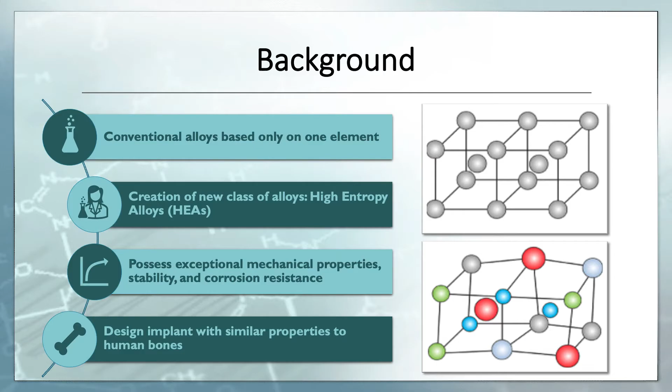There are 4 core effects governing the thermodynamics, kinetics, properties, and structures of the HEAs. The high entropy effect details that since HEAs have a higher mixing entropy, this causes the energy of the solution to lower at higher temperatures and causes a single solid phase to be stabilized.

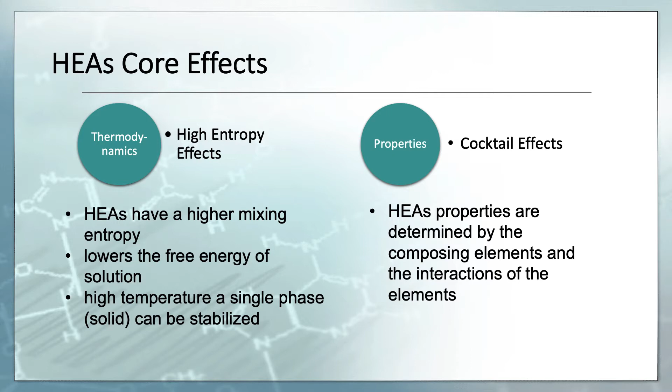The cocktail effect describes the properties of HEAs related to its composing elements. For example, adding lighter elements decreases the density. The properties are also defined by the interactions between the component elements. For instance, aluminum is soft and has a low melting point, but if it is added to an HEA, it can harden the HEA.

When an atom jumps into a low energy site, it becomes trapped, and the chance to jump out of that site will be lower. In contrast, if the site is high energy, then the atom has a higher chance to hop back into its original site. Either of these scenarios slows down the diffusion process, whereas in conventional alloys, the configuration before and after jumping into a vacancy is mostly identical. Additionally, the diffusion of each element composing the HEA is different. Some are less active than others, causing elements to have lower success rates for jumping into vacancies.

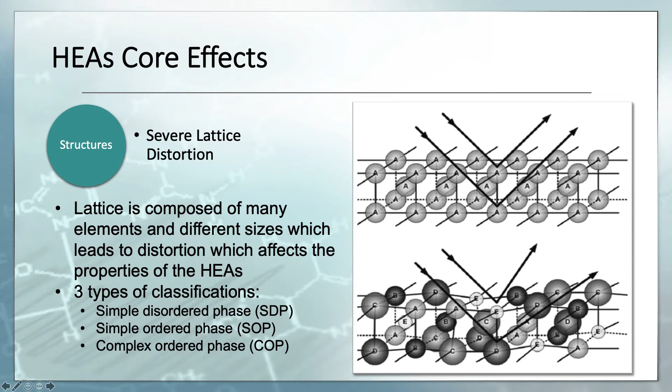Lastly, the severe lattice distortion describes the distortion of the lattice due to the composing elements being different sizes. The top of the picture shows a perfect lattice with the same atoms. The bottom picture shows a distorted lattice with solid solutions of different sized atoms. The larger atoms push away their neighbors, and small ones have extra space around them. This results in distortion, and there are 3 defined types of classifications for the lattice distortion as shown.

This research intends to determine possible alloy combinations that can be more compatible, stable, and corrosion resistant in the human body than the traditional implant materials. The use of biocompatible alloys will solve the problems associated with long-term implantation due to the exceptional mechanical properties they possess, as well as corrosion resistance. We aim to do this by analyzing and predicting a better alloy both experimentally and computationally.

For this project, my focus will be on the computation, and I will be using the OLI Studio Corrosion Analyzer to test multiple solutions with different alloys used in biomedical applications. The predicted corrosion rates, stability, and precipitation formation of all the different alloy and solution combinations will be evaluated. The solutions and/or alloys that seem to possess good potential can be observed and analyzed further experimentally in a lab setting.

Experimentally and computationally, a simulated body fluid, SBF for short, is created to mimic an environment close to that inside of a human body. A contact surface of choice, or alloy, will be put into contact with the SBF to see what interactions take place, what precipitates might form, and what solution parameters change, if any. The goal is to maintain a pH and ion composition relative to the one in the SBF, so one similar to a human body, as well as have no harmful interactions that could damage the human body.

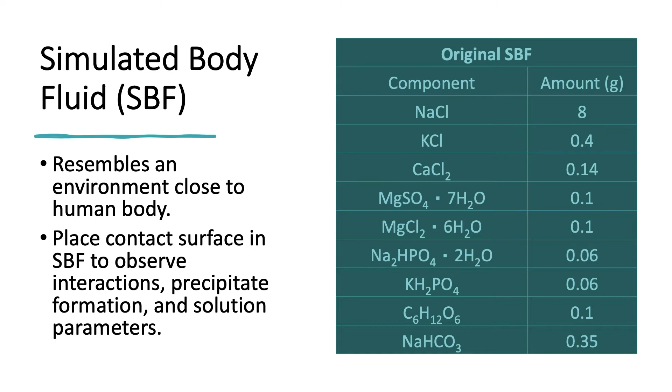Additionally, the type of precipitates that form and are present influence the corrosion behavior. These areas of importance will help to identify what materials have potential for practical applications, as well as gain a better understanding of what phases are formed and how that affects the HEA.

After creating the SBF, a single point isothermal calculation will be performed to view a calculation summary report of the solution. The report generates various information, but the areas of interest include the stream parameters, scaling tendencies, and the species output. In the stream parameters, we are interested in the aqueous properties, and we need to maintain the determined pH, one close to the human body.

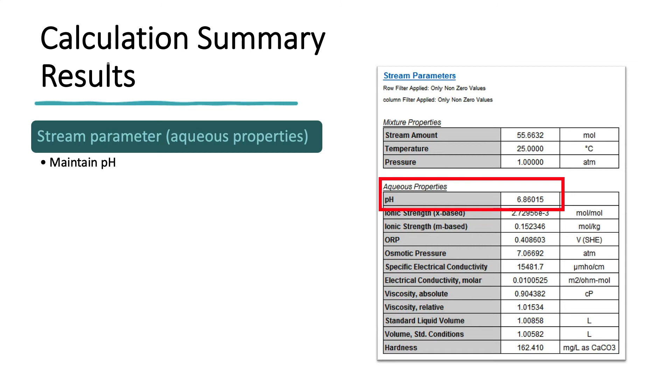The scaling tendencies provide a list of predicted solid precipitates to be formed on a scale from 0 to 1, 1 meaning a solid formed. The goal is to maintain carbonate hydroxyapatite as a solid precipitate, so a scaling value of 1, and all other precipitates at a minimum. Carbonate hydroxyapatite is the solid precipitate of interest given it will most resemble the formation of human bone.

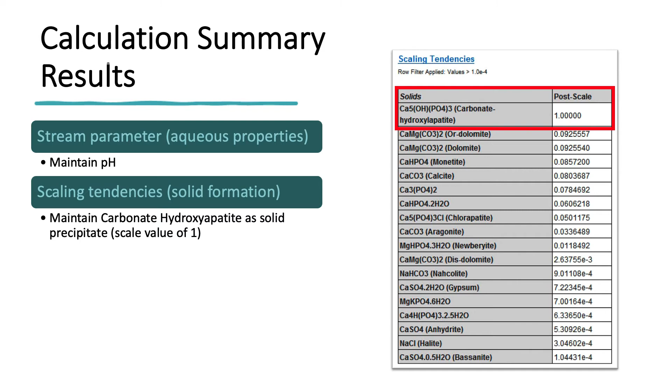The species output provides the total aqueous and solid molar concentration of each ion in the solution. The goal here is to have 0 solid molar concentrations. In red, we see the chloride ion concentration highlighted.

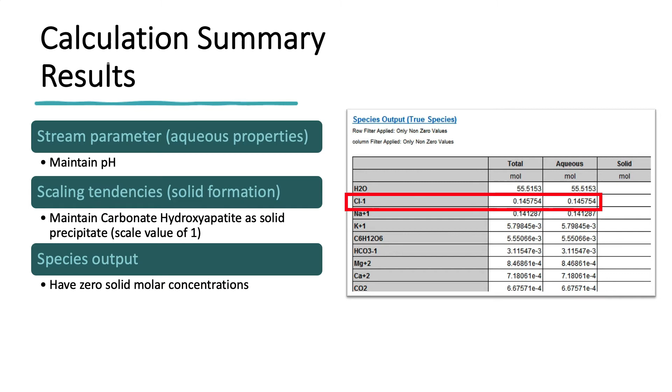For a greater understanding of the created SBF, the mass of certain components in the SBF were altered with the desire of this chloride ion concentration, in red, to be 10 times more and 10 times less than the original chloride ion concentration. So what we did was take the previous chloride ion concentration we saw highlighted in red and multiplied it by 10 and divided it by 10 to give us the goal of what chloride concentration we are looking for.

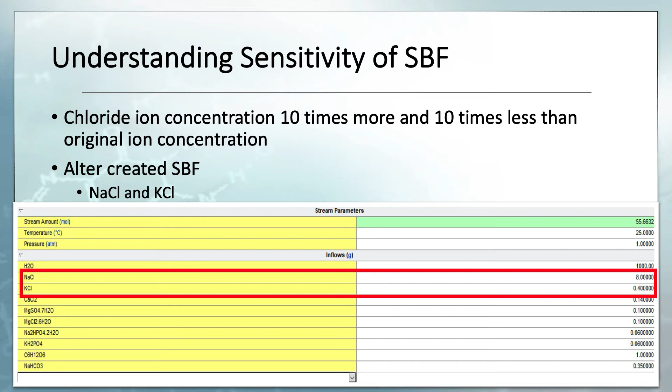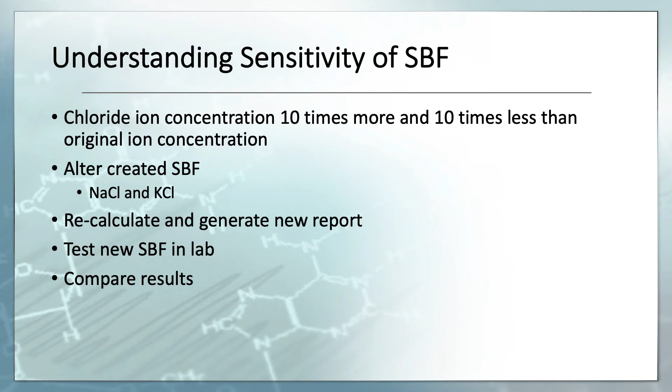And each time the mass of the component is changed, the calculation in OLI has to be performed again to generate a new report, and the chloride ion concentration has to be rechecked. Once the desired chloride ion concentration is found, the corresponding new inflows for each component will be tested in the lab.

Not only can the OLI software be used to predict results from the SBF solution by itself, but it can also be used to introduce a contact surface to the solution. By introducing a contact surface, a stability graph can be generated and corrosion rates can be calculated. The stability diagram is a representation of the Pourbaix diagram, which shows the possible thermodynamically stable species of an aqueous solution at different potentials and pH.

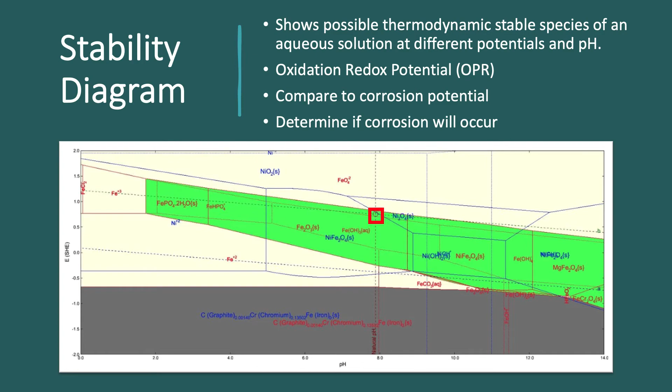Using this information, we can determine which alloys in OLI can be used to make calculations that closely match the alloy used in the lab, as well as have a similar composition to conventional alloys. The alloys selected to use in OLI were alloy 29 and stainless steel 316.

It is also important to note that the corrosion rate plot for each alloy available in OLI was generated and viewed to see if any pitting will occur. For alloy 29, no pitting was observed, but for stainless steel 316, there is significant pitting corrosion.

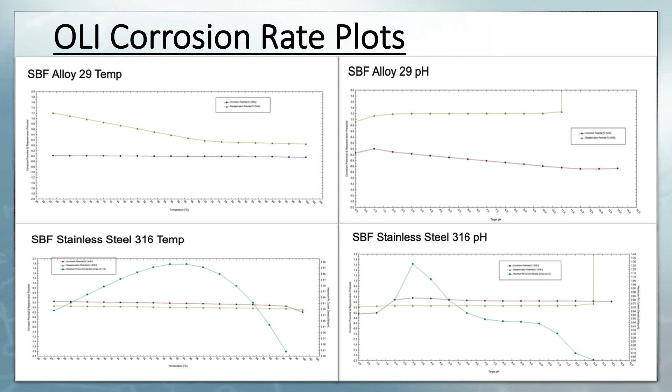Here we can see the corrosion rate plot for alloy 29 by surveying temperature as well as pH. Next, we see the corrosion rate plots for stainless steel 316. Already you can tell a difference when compared to the alloy 29 plots. We see a blue line in the plots. The blue line represents the pitting corrosion that will occur. Any amount of pitting observed will end up compromising the implant.

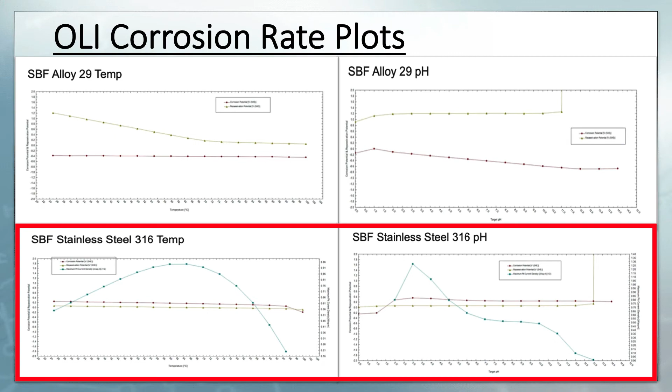But we can take it one step further and see how much of each element making up the alloy is leaching out into the body per year. To do so, we can take the desired element's composition and multiply it by the total amount of metal leaching out into the body per year. For example, in alloy 29, the nickel composition is 29%. So if we multiply the corrosion rate in milligrams per year by 0.29, you will have how much nickel is leaching out into the body per year.

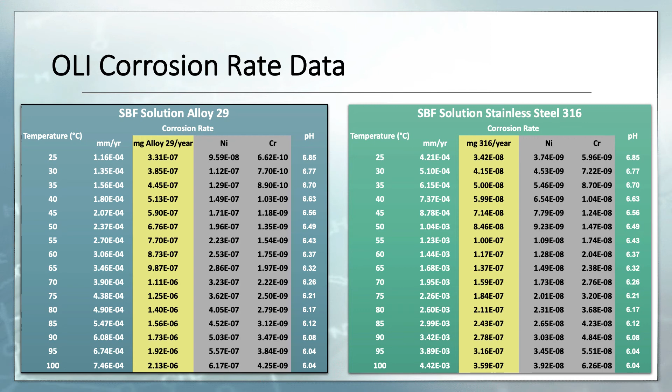The corrosion rates for both elements, nickel and chromium, were calculated since these two elements are the most harmful to the human body. Previously, we selected alloy 29 and stainless steel 316 to be used to make corrosion rate calculations since these two alloys are similar to the alloys used in lab as well as literature.

So to take it one step further, we can also analyze the same alloys from a thermodynamic standpoint by generating a stability diagram. The only restriction is OLI does not offer alloy 29 as an option to select in order to generate a stability diagram. Thus, we will just be looking at the one for stainless steel 316, which is seen on the slide.

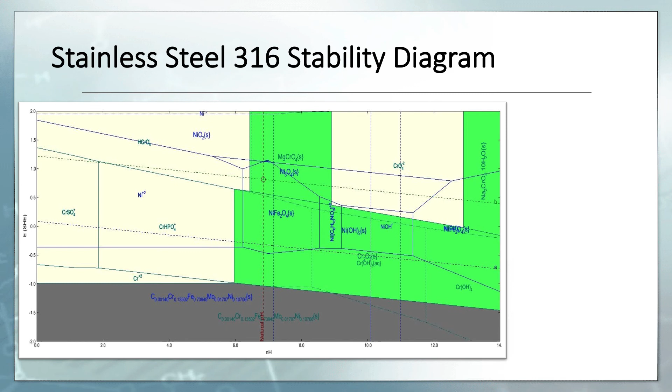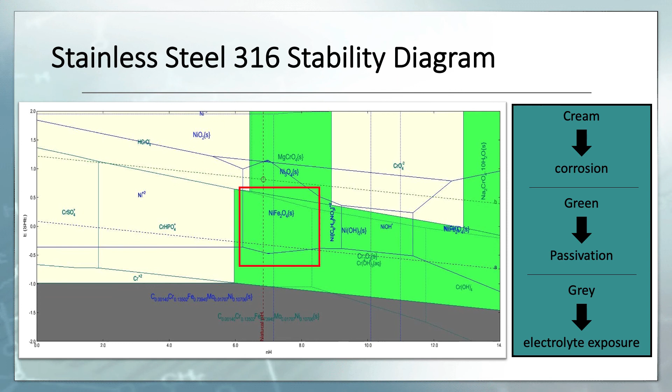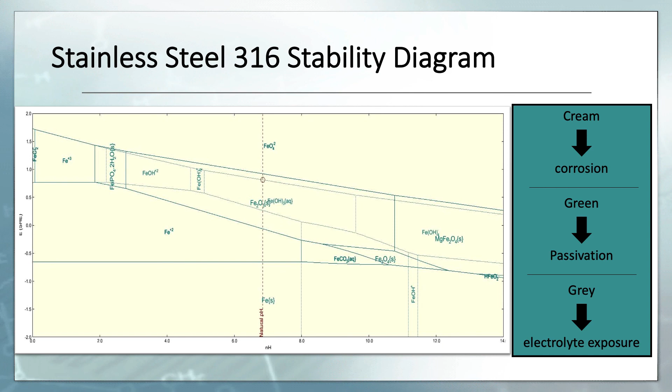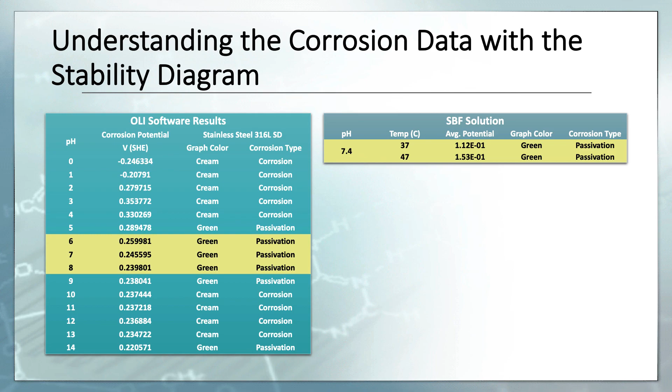The next steps include comparing the results from the OLI software to the experimental results for the new SBF solutions with higher and lower chloride concentration. Also, further compare the corrosion rate data and stability diagram generated from OLI to those obtained experimentally.

The OLI software will also be used to test more alloy combinations used in biomedical applications and start to observe any effects or changes that the concentration of the SBF solution might have on the corrosion rate data. Additionally, trace how many years an implant can be in a body before the toxicity limits of nickel or chromium are met.